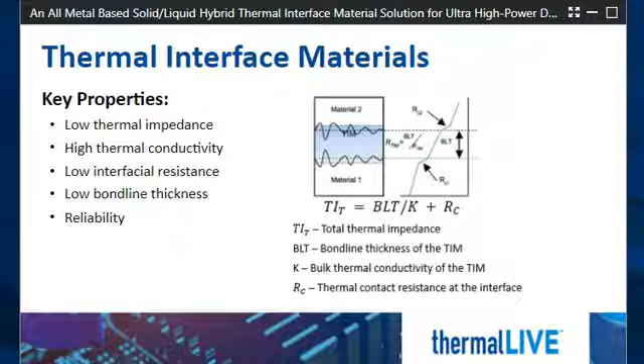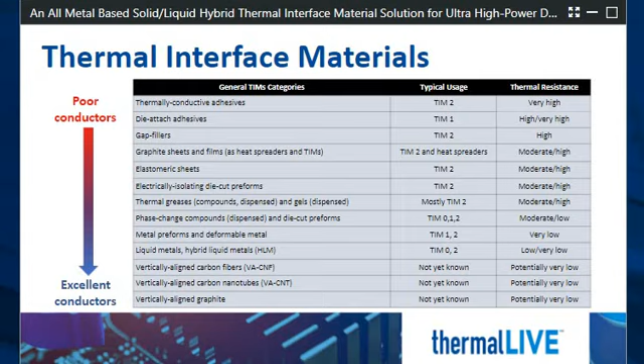Here we have a table with the different TIMs categories. On the top of this list, we have materials that are poor conductors with high thermal resistance, and at the bottom we have excellent conductors. As we can see here, some of the materials that are still very often used in many applications are at the top of the list.

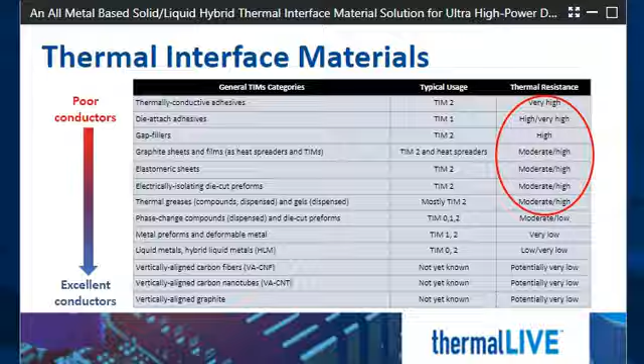Why is that? Why would anyone use any material with such poor thermal properties? Well, they are cheap and they are still good enough for many applications. But that will change very soon.

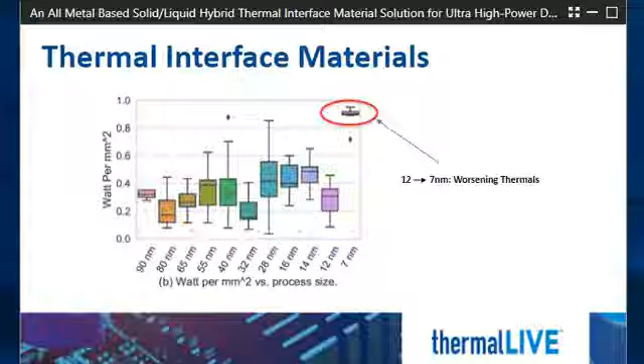And the demand for thermal interface materials will exceed 870,000 tons by 2031. Electric vehicles drive future demands of TIMs, and they will be the #1 user of TIMs by the end of 2031.

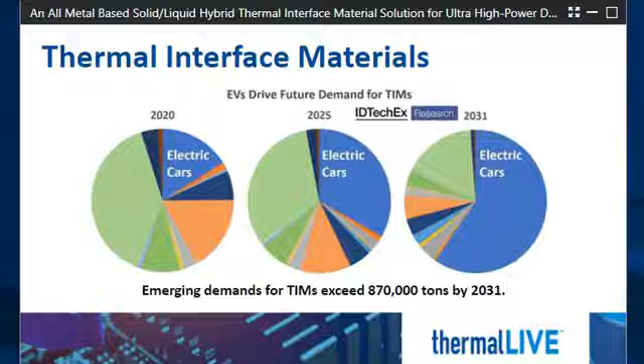Now, when we know key attributes of good thermal interface materials, let's see how metal TIMs fit there. Metals have high thermal conductivity. Most of them will work without any degradation in their thermal properties over time. And they have fairly low bond line thickness. The biggest challenge for most of the metals would be interface resistance. Metals are very stiff, and you would need to apply extremely high pressure to achieve low thermal resistance.

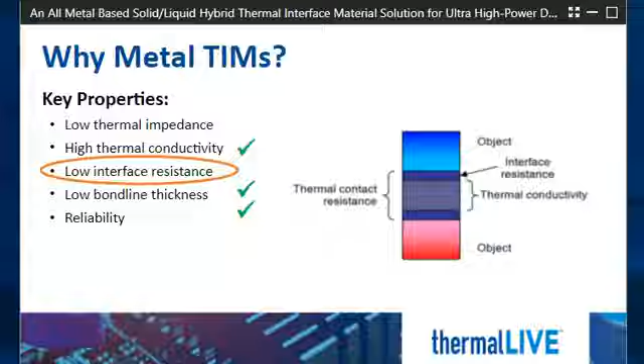With their unique properties, liquid metals are also a very good solution for thermal interface materials. Just like with compressible TIMs, there is no need for any surface preparation for this type of thermal interface material. They have high thermal conductivity and can achieve very low bond line thickness.

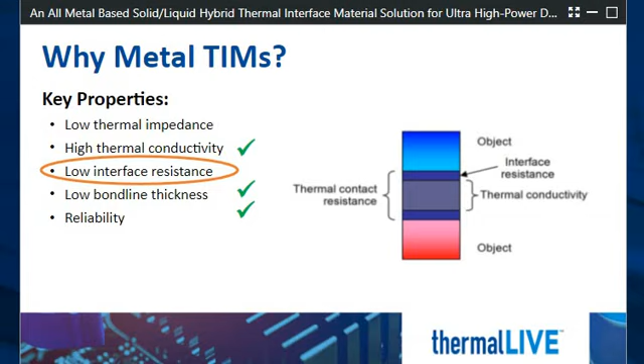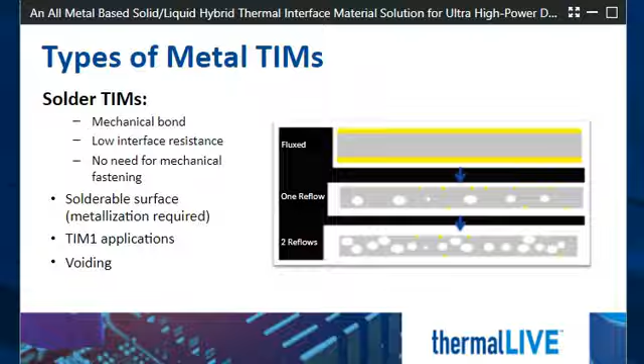If you want to use liquid metals and you have some aluminum parts that can get in contact with them, anodized aluminum would be a good solution. Anodized aluminum will not react with gallium. And at the end, we have oxidation. Liquid metals will oxidize very easily, and that can affect their thermal properties.

The latest generation of metal TIMs are solid-liquid hybrids. Those are thermal interface materials that combine metals that are solid at room temperature with metals that are liquid at room temperature. Adding solid particles to solid-liquid hybrids will improve thermal conductivity, and liquid metals will provide wetting and low interface resistance. Also, solid metals will minimize risk of leaking and improve oxidation behavior.

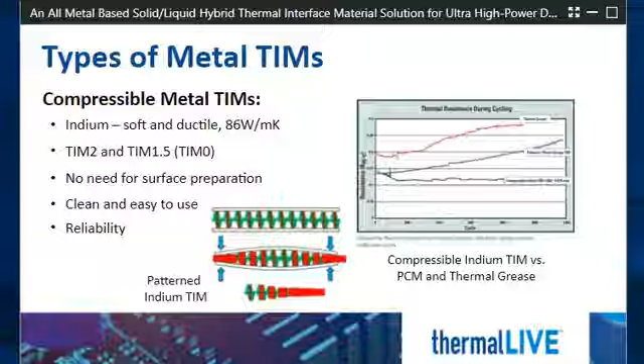We have two main types of solid-liquid hybrids: hybrid liquid metal pastes, and solid-liquid hybrids created during chip assembly, or M2 TIMs.

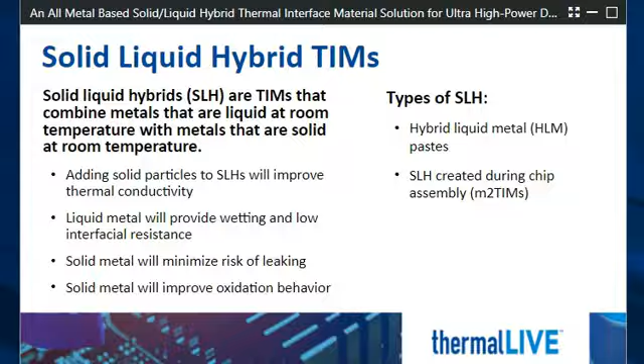Hybrid liquid metal pastes are formed when liquid metals are mixed with high melting point metals, solid at room temperature, creating a high viscosity paste-like material. The liquid part of the hybrid liquid metal paste will provide low interface resistance and allow those TIMs to have thin bond line thickness. Solid parts will minimize leaking risk and improve oxidation behavior, as we can see on this slide.

Recommended processes for high volume production for those materials are dispensing, jetting, and spraying, and for high viscosity hybrid liquid metal paste, printing would be a more suitable process.

Solid-liquid hybrids created during chip assembly, or M2 TIMs, are a combination of the solid solder preform and liquid metal. The solid solder preform should be made from material that is highly soluble in gallium. Just like with solid-liquid hybrid paste, this material will have low interface resistance and high thermal conductivity. The solid solder preform will also form an oxidation barrier and minimize chances of liquid metal leaking.

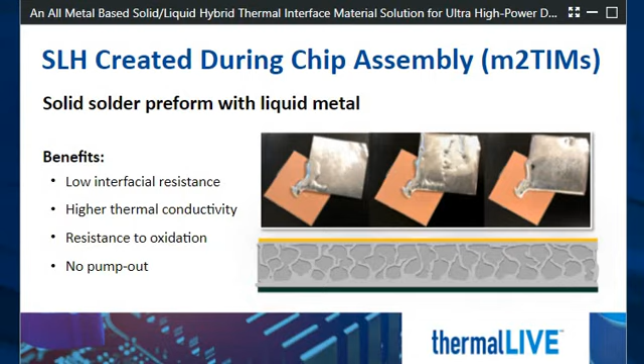And on this slide, we can see how indium will react with gallium-based liquid metal alloy. Gallium will go through the grain boundaries of indium, providing wetting on the surfaces of the solid solder preform. Thanks to the solid indium preform, the newly formed matrix will have high thermal conductivity, and liquid metal will provide low interface resistance. The solid indium preform will also help keep liquid metal in place, so none of the material could be squeezed out.

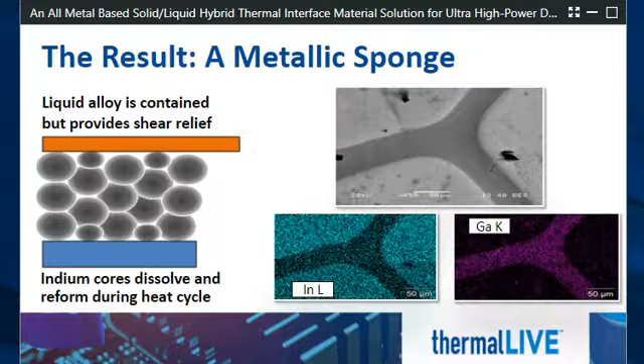Just like with liquid metals, thermal resistance of M2 TIMs doesn't change dramatically with thickness. Basically, this combination of solid and liquid metals will have the best properties of each type, solid and liquid metals.

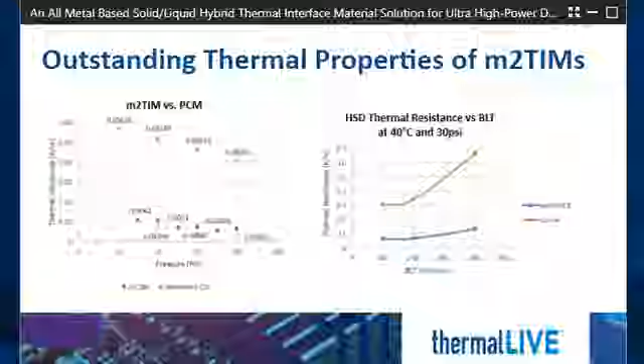Solid-liquid hybrids won't pump out. A power cycling process of 0 to 80 watts with a peak junction temperature of 105 Celsius was applied on M2 TIM. After more than 20,000 cycles, none of the material was pumped out and we couldn't see any huge degradation in performance.

In the end, we can say that semiconductor devices will continue to increase power usage and additional power will produce more heat. Most of the thermal interface materials currently used in the industry will not be able to achieve those heat dissipation requirements. Metal TIMs, with their outstanding thermal properties, will be more suitable materials for high-performance devices.